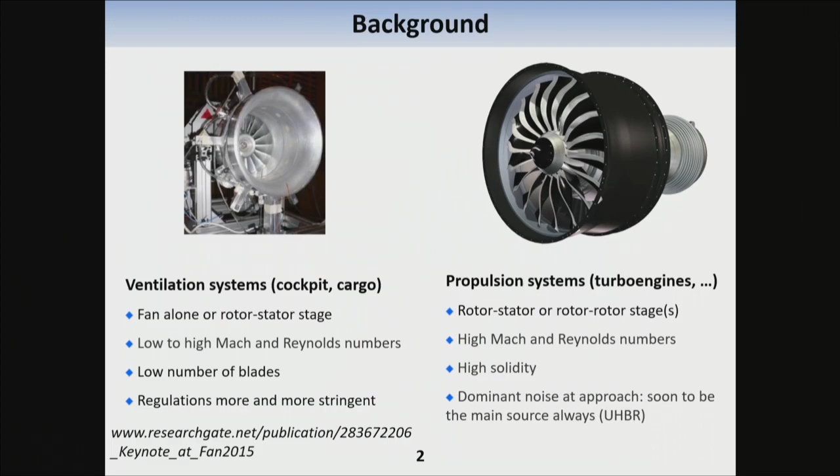These machines, I won't really spend much time on it. I actually gave a keynote a couple of years ago on that, so if you're interested, you could see basically what is the status on the noise on these machines in this link. And I will mostly spend time on the propulsion system, so the high-speed machines.

There you can have a rotor stator, or you can have a rotor-rotor stage, or stages. So you can have several stages. And all of them have high Mach number and high Reynolds number. So that makes the problem also a little bit more difficult and more computationally intense.

Now, the other thing, which is relevant both for aerodynamics and acoustics, is you usually have a lot of blades. To achieve the pressure ratio, you need a high solidity, and this will introduce cascade effects, both on the aerodynamics and the acoustics, and the effects are quite different, actually.

Now, for propulsion systems, this is very relevant even nowadays, because this is the dominant noise source at approach, and it is also the dominant source in the forward arc in almost all flight conditions. And we'll see that it's actually becoming even more relevant with the evolution of the propulsion system. And this is my next slide, to show you some of the evolution of these propulsion systems.

We will start with a plot that Chris Hughes did in 2008 at a NASA lecture, where he showed the evolution of the propulsion system in terms of two criteria. One was improved fuel burn, which is always what we are looking for, but also noise. And here it was showing the margin to Stage 4, which is the current regulation.

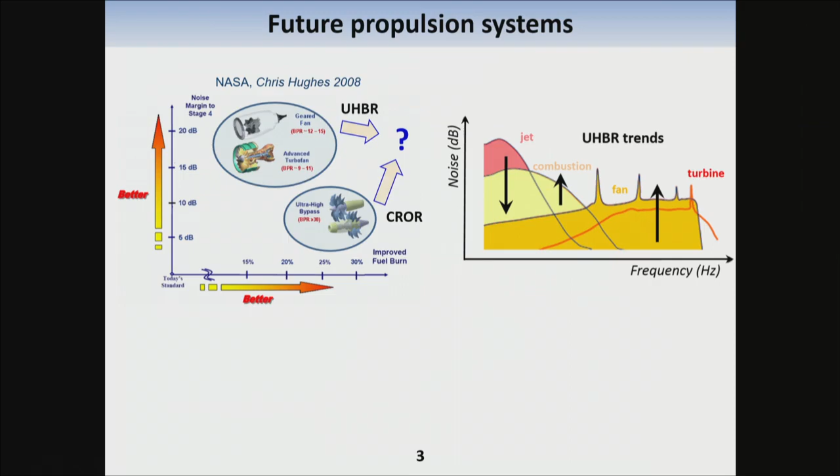And also, could we reduce the noise from the contra-rotating open rotors? And what we have seen in the last 10 years is a convergence of these two towards where my question mark is here. But in terms of integration, because aerodynamics and noise are not the only things, for the moment the choice has been to go for ultra-high bypass ratio first, and then maybe contra-rotating open rotors in the future. But for the moment, I would say this is on ice, so not selected as the next step.

So basically, there are two propulsion systems we're foreseeing in the near future, contra-rotating open rotors and ultra-high bypass ratio ones, and the ultra-high bypass ratio ones are going to be the next generation of propulsion system. But in both cases, you see that the issue was always to get improved noise. And both systems have their own tonal and broadband noise.

I'm showing an example here of a current high bypass ratio typical spectrum, where you see the noise level in dB as a function of frequency. And you could see that many components within the turbofan are contributing. At low frequency, it's the jet and the combustion that are competing. And at mid and high frequency, it's the fan and the turbine that are mostly contributing. So all these elements are relevant.

And what's going to happen with the ultra-high bypass ratio? The jet noise is going to go down because the exit jet velocity is going to go down again. Combustion noise might actually go up, for a simple reason that is not related to noise directly: we want to go to lean combustion to reduce emissions, and this is more unstable.

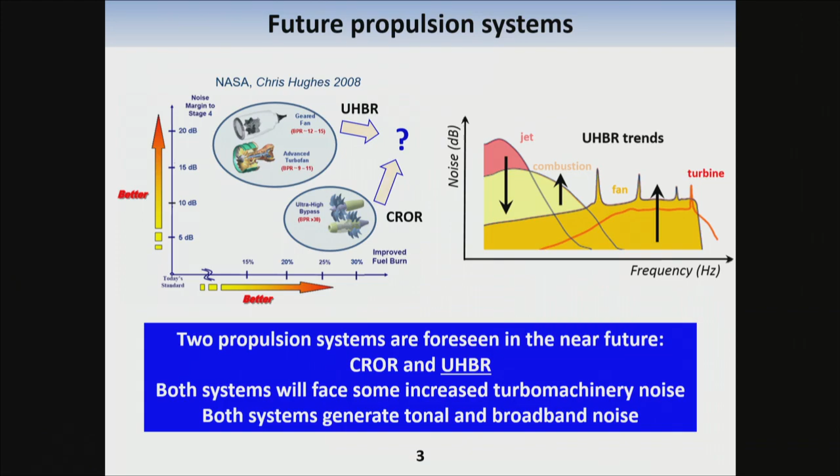And also because of the increase of the nacelles, you need to make it shorter, so you need to reduce also the number of stages, and now the turbine is not actually filtering as much as it used to, and the combustion noise may actually go out more. So this should probably go up. And then all the other contributions, and mostly the fan, because it's increasing, that's going to actually go up. So this is, I think, the trend we're going to see.

So you see that it's already a significant part of the noise, this turbomachinery noise, but it's going to become the major one in all flight conditions. So basically, we need to really focus on this subject. Now, how do we do that? So that's my next slide. It's a little bit crowded, but I will walk you through it. So these are the different methods for turbomachinery noise prediction, and I will start from the left.

Basically, in any turbomachinery noise prediction, you have 3 steps. You start on the left by defining the excitation, and this excitation will come from different noise mechanisms that you will see later. But depending on the mechanism at stake, if it's a generation of noise or propagation, it could be a vorticity wave, or it could be an acoustic wave. And these could be 2 different excitations, for example.

And then you have to define basically how the blade responds to this excitation. And this is my second step in red here. And once this blade has responded, so you have an unsteady loading, this will be an equivalent dipole that you can then consider as propagating to the far field, and you can use some kind of propagator here, either a linearized Euler propagator, for example, or an acoustic analogy. And in the examples I'm going to show, it's mostly acoustic analogies.

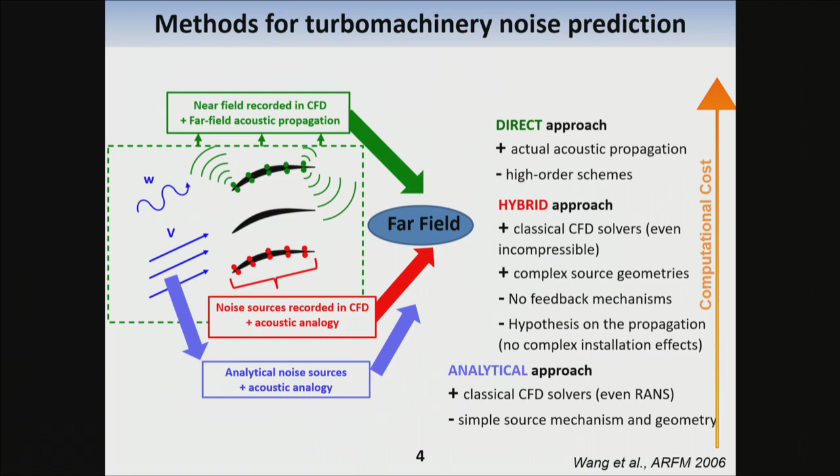And then the final one is where you do everything at the same time. You simulate the excitation, you simulate the blade response, and you also simulate the propagation. This is really the holy grail. But at this stage, it's still very computationally intense. But I will show already some examples of it. And there's one method that is actually helping us get there.

Okay, so let's start with the bottom one, the analytical approach. What do we need to do, basically, to model each of the steps analytically? I include in there also the possibility to connect that with some RANS simulations that are used commonly in design. This fits here, because the RANS will provide you some inputs for the analytical model. But, and I insist on that, everything which is acoustic is unsteady. So the RANS is not going to give you any noise information directly.

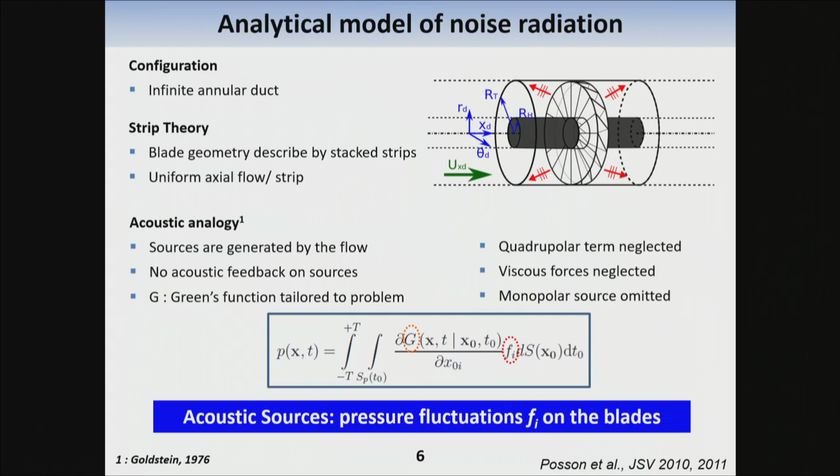Now, if we keep only the dipolar term, you see that what is left to determine now from my simplification is really this Fi, so the unsteady force on the blade. And this is the final step that we need to do: to determine the acoustic sources, the pressure fluctuation on the blade. So now, how do we do that? And you can still do it analytically, again, provided some assumptions.

Now the next step, which is valid for most of the components, except I would say the turbine, is to assume that these blades are thin, and that the camber is also not too high, and you end up simplifying with a flat plate, so a flat plate without thickness and camber. Then, as I mentioned, we neglect the viscous effects. So we are left with obtaining the inviscid flow parallel to a flat plate. And to account for the wakes, because this is a realistic feature in all this turbomachinery, we have to apply a Kutta condition at the trailing edge.

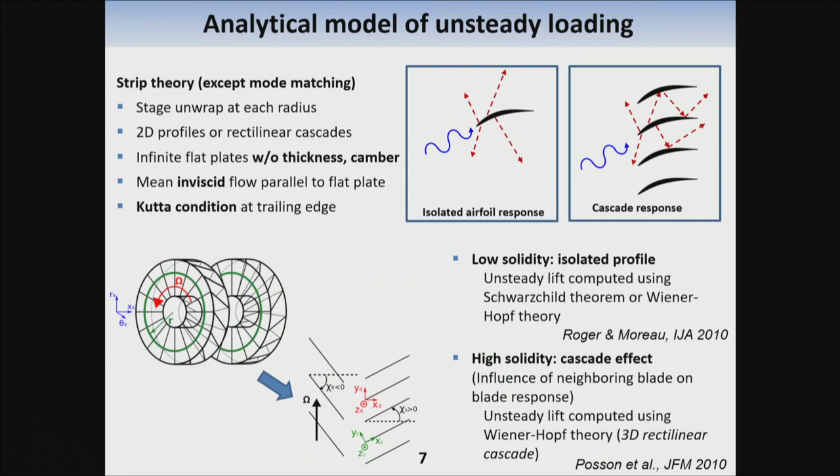Now, as I mentioned, we need to account for cascade. And if we do so, we get the unsteady lift using the Wiener-Hopf theory. But the only case that is really tractable is when you have a 3D rectilinear cascade. So we put the cascade now rectilinear. So this is what you have to do if you want to go analytical. Now, what I need to do is characterize my excitation here. What are my possible vorticity waves here, or acoustic waves?

So these are the noise sources, and I'm giving the example of a classical ultra-high bypass ratio turbo engine. These are all the sources that you can have. If I start from the inlet, you might have some upstream distortion coming from the fact that you have an angle of attack, or if you have some side wind, this will create an upstream mean distortion. By the way, in green are all the mean flow effects, and in blue are all the turbulent chaotic effects. And on top of this mean distortion, I might have some upstream turbulence that will impinge on the rotor blades, and that will create a dipolar source on the rotor blade.

Now, on the nacelle, you will have growing turbulent boundary layers, same thing on the spinner. And these boundary layers will impinge also on the rotor. And that's another noise source on the rotor. Then from the rotor, you will have growing boundary layers on the rotor blades. And this will create the boundary layer turbulent contribution, or the self-noise, or the trailing edge noise of the rotor.

And at the tip, you have also a gap, and because of that, as everybody knows here, you have tip vortices forming, and these tip vortices will also have a contribution to tip noise. So this is my source here. Then this rotor will shed some wakes, and these wakes will impact basically on the outlet guide vanes.

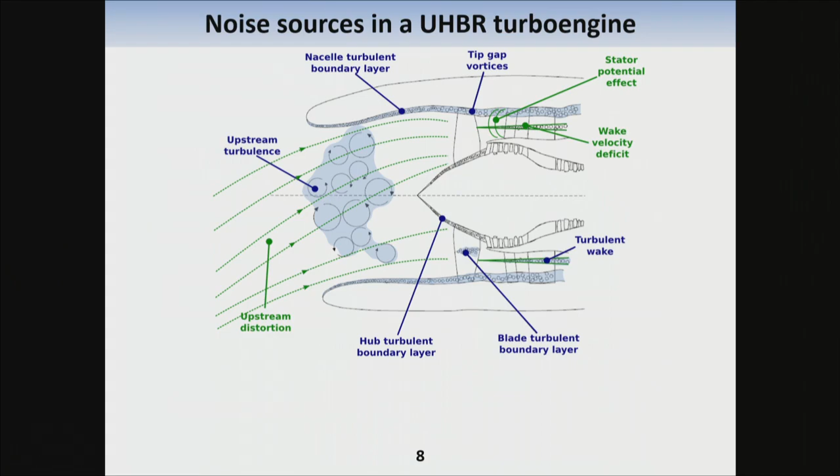So you see that overall we have many aerodynamic interactions, and we need basically to do all the steps that I showed before for all of them. And this has been actually the work that has been done in the past 20 years. One thing I want to emphasize also: when you start having heterogeneous stator vanes and cascade effects, you have an additional thing to account for, but this is feasible in all these analytical models. So in conclusion, keep in mind we have several tonal and broadband noise sources.

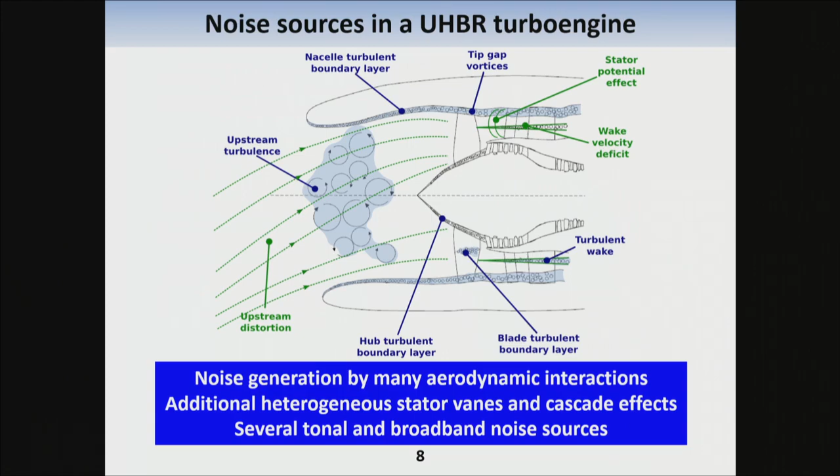So now to illustrate my words, I will go through two basic comparisons throughout the talk today. One will be the NASA ANCF. Actually, I shouldn't call it NASA anymore, but the ANCF test case that was originally at NASA and is now at Notre Dame. Sorry, Scott, I forgot to update. And this configuration is interesting because a lot of rotor stator configurations were tested. They could go from 14 to 28 stators, and you could also move the distance between the rotor and the stator.

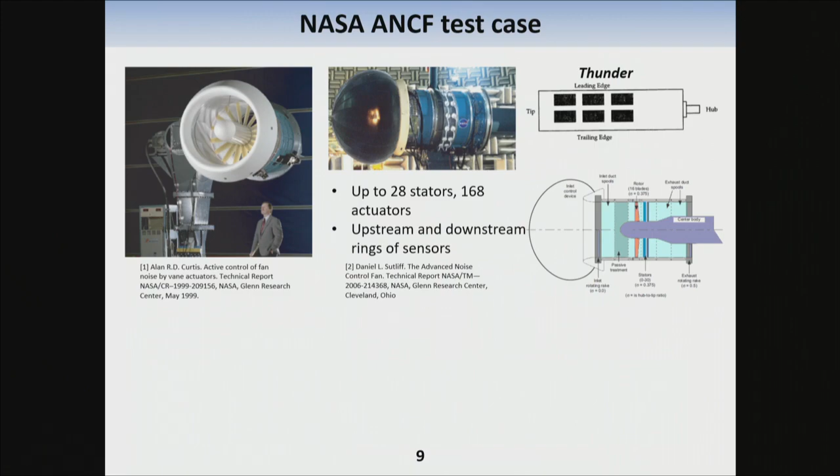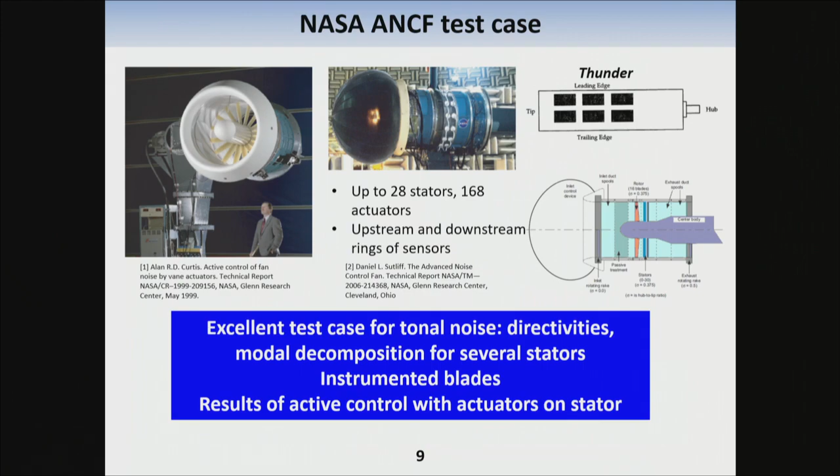It was also designed for noise localization and modal decomposition, so you have upstream and downstream rings of sensors to do so. So it's an excellent test case for tonal noise because you have directivity and modal decomposition for several stator configurations. And on top of it, you have instrumented blades, so we can also compare the blade response, our numerical and analytical ones, with the measurements. There is also some active control done on this configuration, but I won't show any comparison there.

Now for broadband, we're also using another NASA test case, which is for the moment, I think, the only one that is open: the SDT, the Source Diagnostic Test case. It's a GE configuration, very similar to a CFM56 configuration in many ways, and it's a modern high bypass ratio fan, which has 22 rotor blades and, in its main reference configuration, 54 stator vanes.

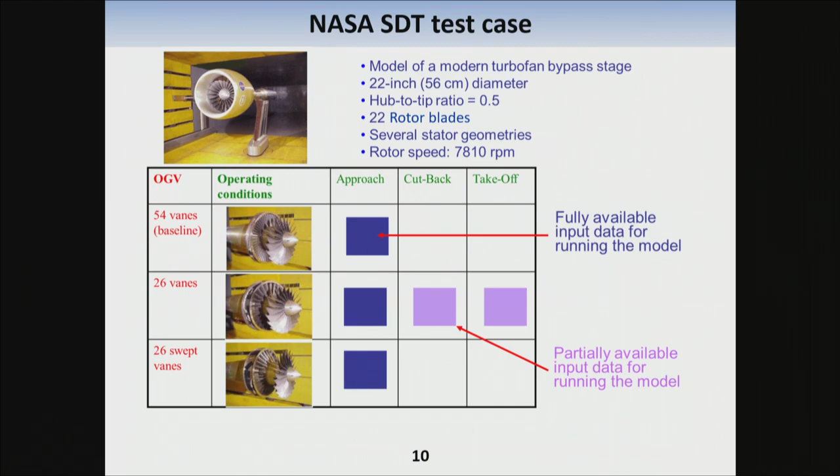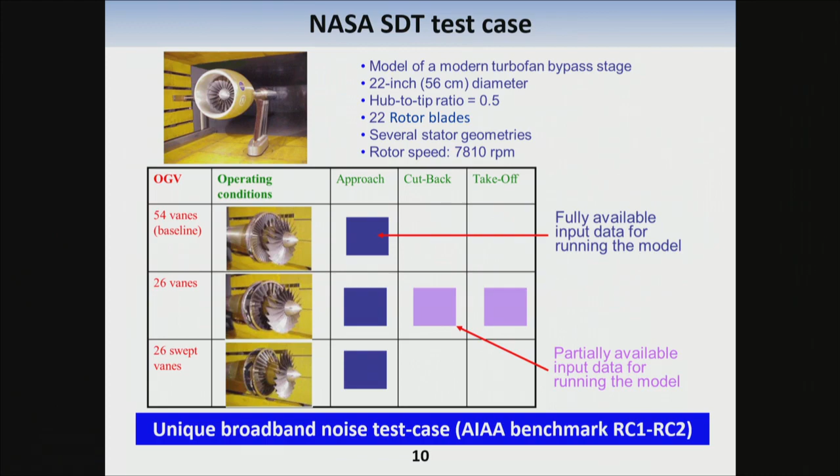This machine was tested in 3 configurations, but at approach you have a full aerodynamic and acoustic database to compare with. So this is the one that I will be comparing with. There are other stator configurations, a low count one and a swept low count one, called the low noise configuration. But as I mentioned, I will focus mostly on this one. So it's a unique broadband noise test case, and I suggest everybody try it because it's quite interesting.

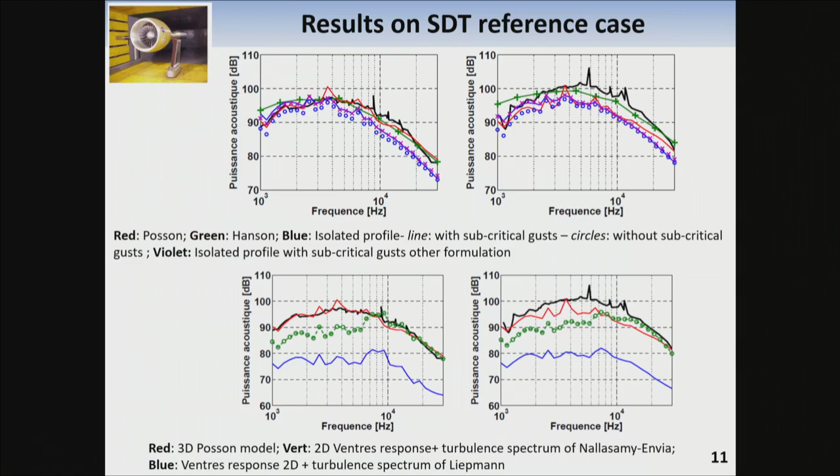So if I summarize, that's a lot of information here. I want to stress that it's very important to be 3D at all steps. You need to have a 3D oblique gust, you need to have a 3D cascade response, and then you have something that is more realistic and much closer to the experiment and to reality. And then at low frequency, you need to include a subcritical gust. And finally, the turbulence spectrum has to be very realistic and should be assessed either numerically or experimentally. And I will show an example on precisely this SDT case later on.

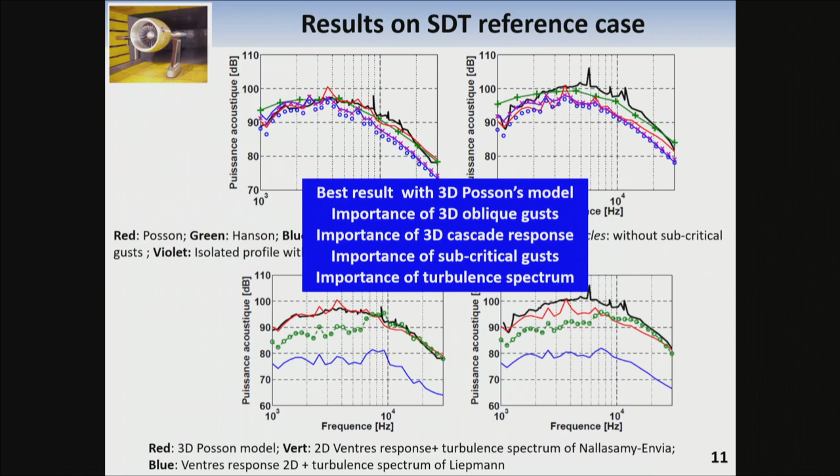Okay, the final thing that we have been looking at is the effect of swirl. I mentioned that we were assuming a uniform axial flow. Now, if you are in the interstage, between the rotor and the outlet guide vane, this is really wrong. You have a high swirl, and you're not accounting for it with your analytical Green's function. So we went to a modification of this Green's function. Now you are no longer analytical, unfortunately, because you have a sixth-order wave equation to solve when you have swirl.

But if you do so, numerically you get your Green's function, then you can compare uniform axial flow with swirl plus shear flow. So this is my comparison now: the symbols are again my NASA data. The black line corresponds to my previous model. The orange one is my new code, but putting swirl to zero, so this should correspond to the black one. So you see it's matching well, except at some resonances, but we can discuss that later on.

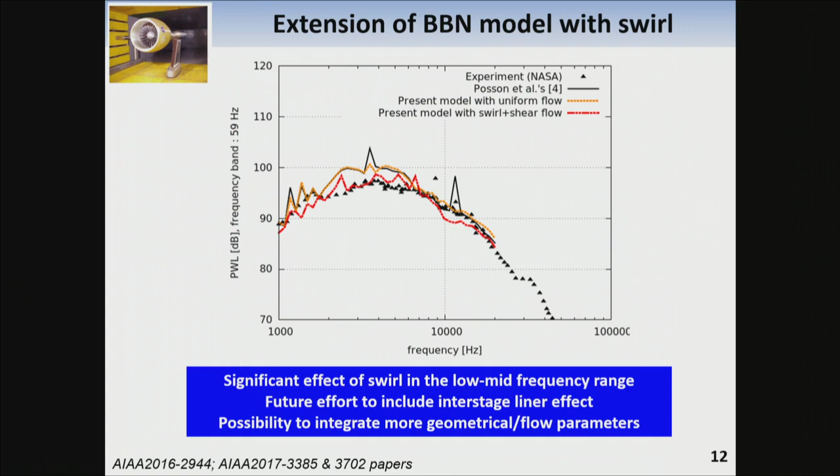And then we have the swirl effect. And you see that the swirl has actually some significant effect at low and mid frequency. So swirl is still, I think, a significant contributor here. Finally, the future effort will be to also include interstage liners, because I forgot to say it, but all that I've shown so far assumes solid walls. So no effect of liners.

We have done some effect of liner, but in a more simplistic case where we've done a propagation problem in a duct, where we basically include a lined section in a uniform annular duct. And we looked at the effect of the swirl in this section on the modal transmission loss, so transmission loss per azimuthal mode, by comparing the modal power transmitted with respect to the inlet power. Now, if you want to have details of our analytical development, you can go to these two JFM articles.

The main effect of including swirl is to have this additional red term here in the Ingard-Myers classical effective impedance. And you see that it's actually related now to the vortex design of your blade. So the swirl is playing this role. From an acoustic point of view, swirl adds a spring-like term in the original mass-spring-damper system that the Ingard-Myers model describes.

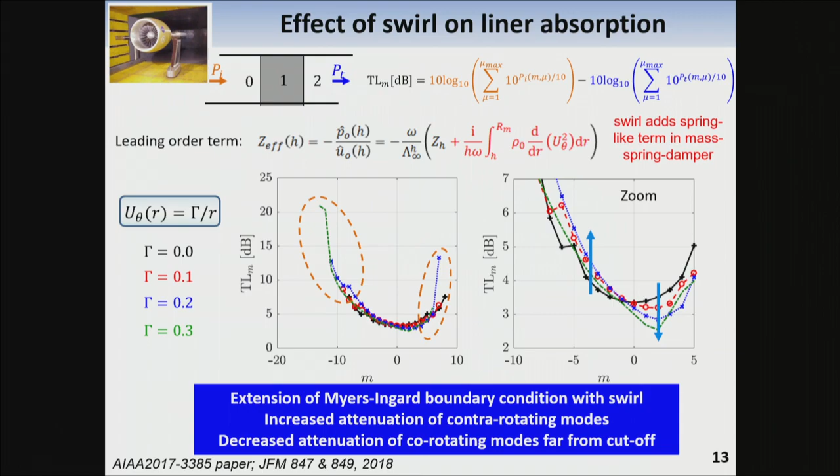There are some effects of swirl: the whole diagram, which had this bell shape without swirl, is now rotating with respect to mode 0. So you have a decrease of the transmission loss for the co-rotating modes, and an increase of the transmission loss for the contra-rotating modes. So swirl increases attenuation of contra-rotating modes and decreases attenuation of co-rotating modes. And far from cutoff, I have to insist. So this is one model.

Now, one thing that is problematic in any of these models based on strip theory is that you always have rectilinear discontinuities between the different strips. And also, because you have strips, you prevent any dispersion of the mode in the radial direction. So to account for that, we've been developing a new method called the mode matching technique, where we do a field expansion in orthogonal modes in each subdomain: before a row, in the row, after the row.

If you do that, you can eliminate the need for a rectilinear response. Then you match the acoustic field at the interfaces, ensuring continuity of pressure and velocity at the interfaces before and after the blades. You end up with an infinite system of equations, so you need to truncate, and then you get the modal coefficients by matrix inversion of the truncated system. The basic theory is not too complicated, but it's quite involved to get it to work fine. At least it eliminates the problem of the rectilinear discontinuities.

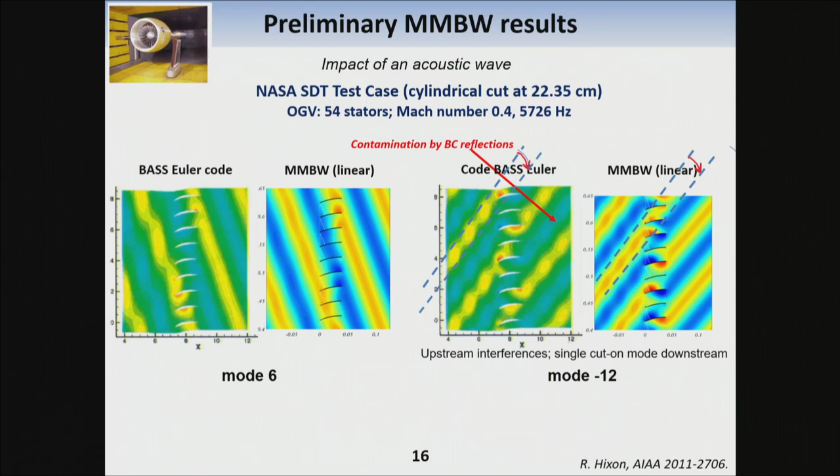When we look at the angles also of the waves that are either reflected or transmitted, we also have a very good match between the two calculations. And the other thing, the advantage actually of the analytical model, is that we don't have any spurious reflections from the boundary conditions that you see here and here in the Euler equation. So I would say we have an excellent agreement, with excellent results without the spurious reflection.

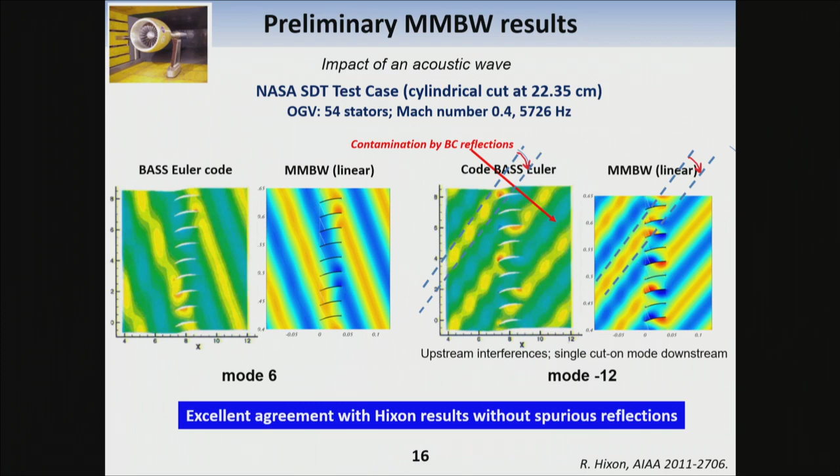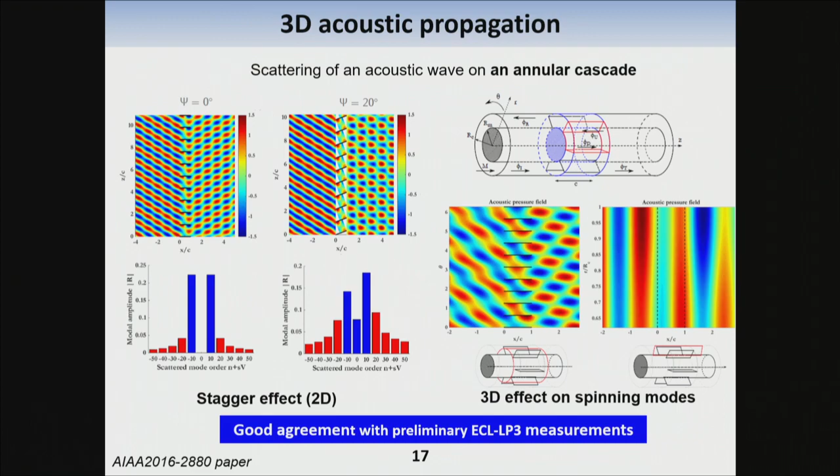And then we went also to a 3D configuration to show that we could have this radial mode scattering that we couldn't have with the strip theory. And you see that we have a nice continuous field both upstream, so the blades are here, both upstream and downstream of the cascade. And these are actually in good agreement with preliminary measurements that have been done in the LP3 setup at École Centrale de Lyon.

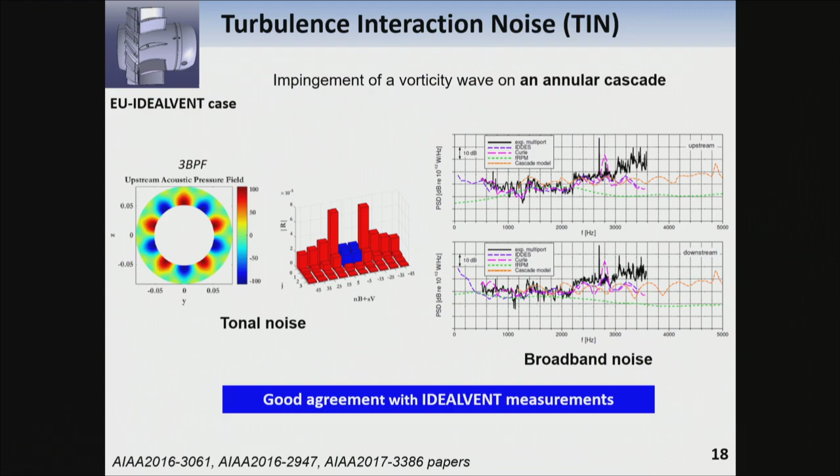And more challenging was to see what we could get from the broadband side. The measurements are in black here, performed at VKI. And all the purple, pink, and green dashed lines are simulation. The purple one is a fully IDDES simulation of the system. Our simulation is this cascade model here, and you see that we are predicting as well as this much more involved test case, and at a much lower cost. Of course, it's almost instantaneous compared to the other one. So the mode matching is, I think, another very promising method.

Okay, enough of this analytical model. Let's move on to hybrid cases. All of this will involve numerical methods to predict the noise sources, and we will use different approaches depending if we want to get only tonal noise. Tonal noise is mostly generated by deterministic problems, like mean wake impinging on the stator, for instance. And this can be dealt with nicely with URANS. I will show some example of that. And it does need turbulence modeling.

Now, if you want to go to broadband noise, which covers all the frequencies, you need to go to some more involved unsteady simulations where you have to resolve some of the turbulent eddies. If you limit yourself to the larger eddies, you can do a large eddy simulation. And if you resolve all of them, then you can do a DNS. For these two approaches, we have been using two different methods. One is based on the classical Navier-Stokes solving, and the other one is based on the lattice-Boltzmann. So on the lattice, we solve the Boltzmann equation. And this is my LBM test case.

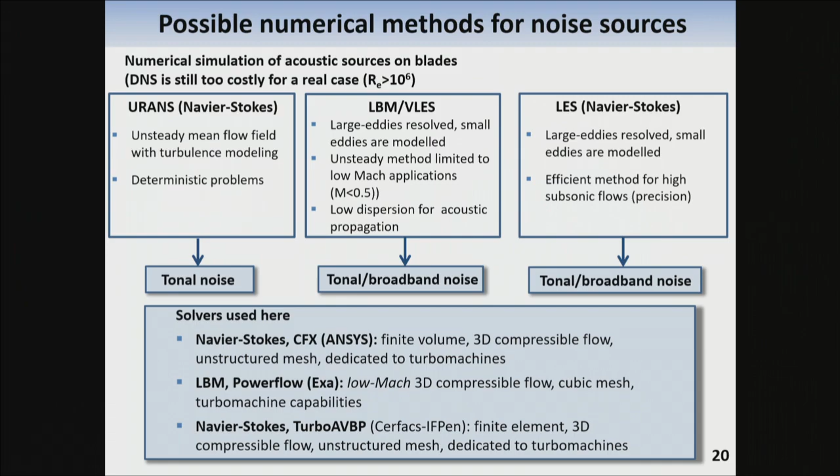Now, in terms of codes, we've been using mostly CFX ANSYS for the URANS runs, PowerFlow from Exa, Dassault now, for the LBM, and AVBP for the unstructured 3D LES compressible solver. One thing I want to emphasize, all of these will be compressible simulations. So we are really solving also the acoustics in the field. And DNS is a little bit too costly, even though we start using it for airfoil noise.

The first case we ran was the compressor case, compressor wake interaction noise, because the blades are small and they don't need as many grid points. And also it's a low pressure research compressor, so we have a lower Reynolds number. And these are two examples. So we started doing the URANS and predicting tonal noise, and then we went to do some LES simulation that you see on the left. What we learned from it is, we didn't have any acoustical data for this one, so we couldn't compare, but we did some assessment of some technological effects.

And on tonal noise, we showed, actually with this thing, by changing the geometry here of the stator vanes, that viscosity, thickness, and camber had some effects, but the main one was really camber. We could neglect viscosity and thickness, basically. So that's why we modified the analytical model to account for camber.

Now, what we learned from the LES side was the importance of the span-wise coherence length on the predictions. And this is also very consistent with airfoil noise. We know that the span-wise coherence of wall pressure fluctuations is one key element if you want to have a good prediction. So this is confirmed by the direct simulation here.

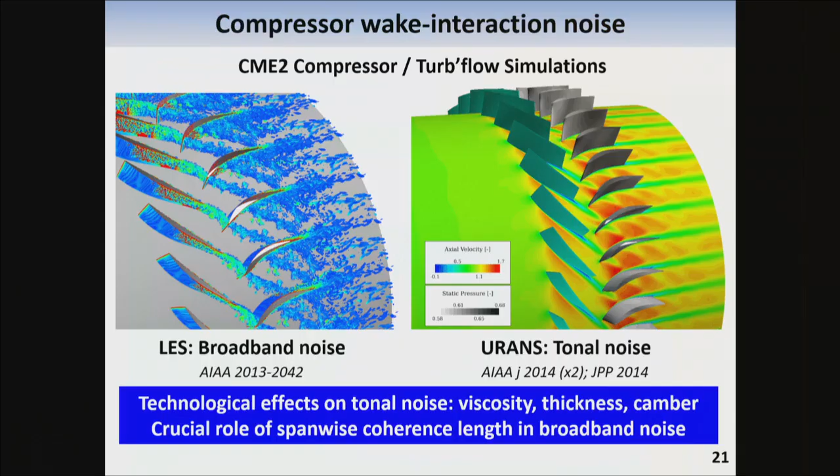But one thing I want to emphasize is URANS is actually under-predicting the levels, and by a big margin, as we'll see in the next test case. And this is for all turbulence models, and we had much better results with LBM using an LES approach, where we have much stronger levels. But I still haven't compared yet, so I need to do that.

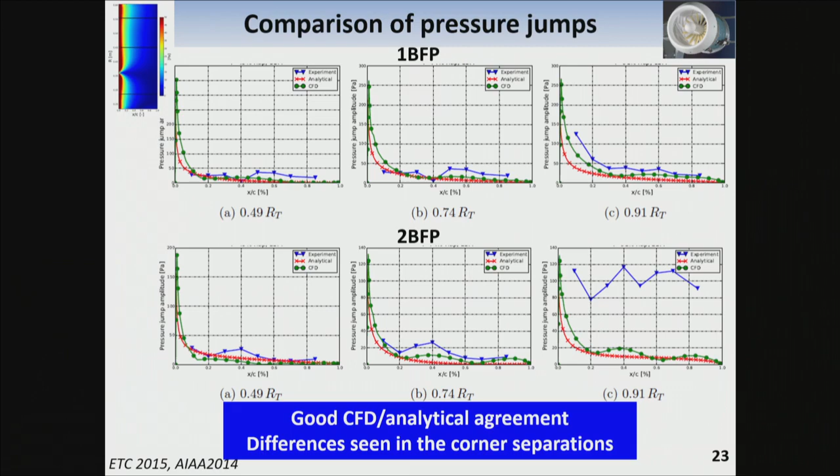And you see that the analytical prediction is matching quite well the URANS calculation, and consequently also the experiment. So differences are only seen, I would say, in the corner separation, and of course the analytical model cannot do much there. Now, what is the consequence? Because these are probably big differences for aerodynamicists, but what are the consequences on acoustics? And this is actually quite mellow.

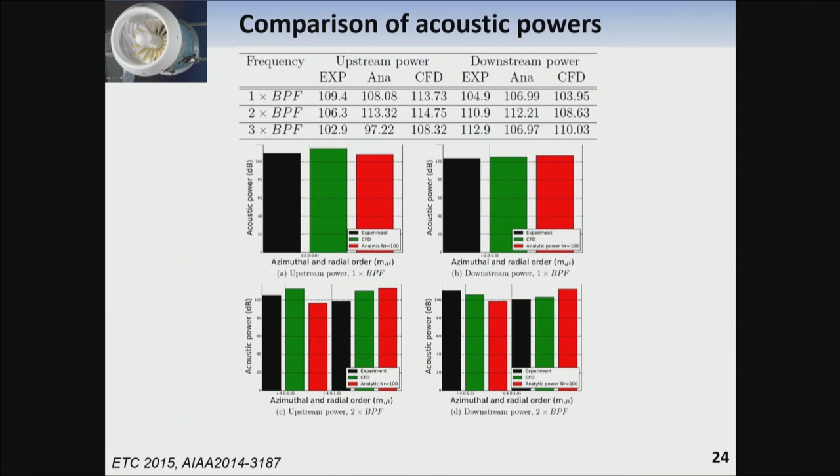We see here the prediction from both: again, CFD will be in green, red will be the analytical guys, and the black guy is the experiment. And you see that for both the BPF and the 2 BPF, we have a good modal distribution, and also pretty good levels for all different modes. Things start to be worse when you move to higher radial modes, which is, again, expected because of the strip theory preventing the scattering in the radial direction. So good overall analytical and experimental agreement.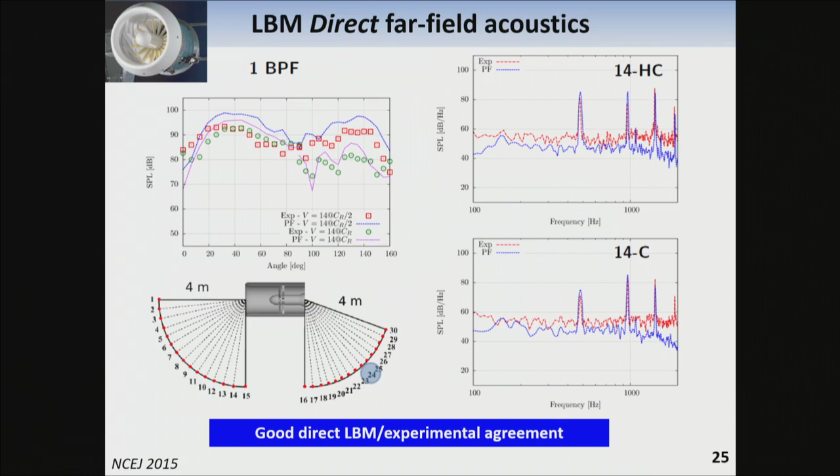But the tonal noise is quite well predicted. So if we refine the grid, we should probably get better results. Okay, from there on we also looked at heterogeneous stator distribution, and we did PowerFLOW simulation. We didn't have any experimental result there, but we compared the PowerFLOW result that you see at the top, and this is for one configuration here.

We've done many more. And I wanted to show this slide because it shows the power of the analytical methods. Because when you compare the sound power level as a function of azimuthal modes, you can split in different components with the analytical models the different origins of the sound. So for example, for the homogeneous case, we could show nicely that everything was coming from the wake. So wake interaction, no surprise here.

But the residual one that we had in the simulation, and also in the measurements in this case, was due to the distortion. We have a residual distortion at the inlet because of the experimental setup, and this is actually causing this background level. So this is distortion and wake.

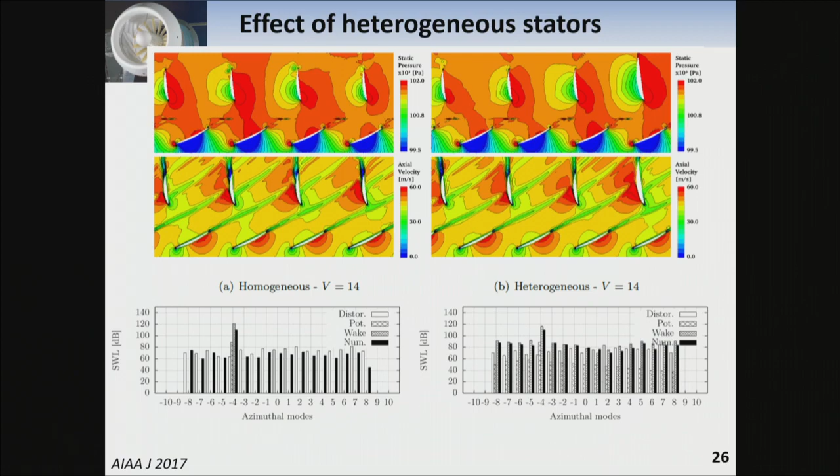Now we add a small heterogeneity here, so we thicken one stator blade, and we increase also its chord length. And now we look at the differences, and you see that now we have an increased background level. It's still wake dominated, but now we have a potential effect that is popping up and contributing. So again, the analytical acoustic models really provide a nice idea of that.

Finally, one thing that is important with direct simulations is you can also discover new mechanisms that had been seen in the 70s by Parker in some Rolls-Royce machines, which are resonances. So we showed that in one configuration we had a beta Parker mode, and that was contributing to a tone that we didn't understand, that was not blade passing frequency at all.

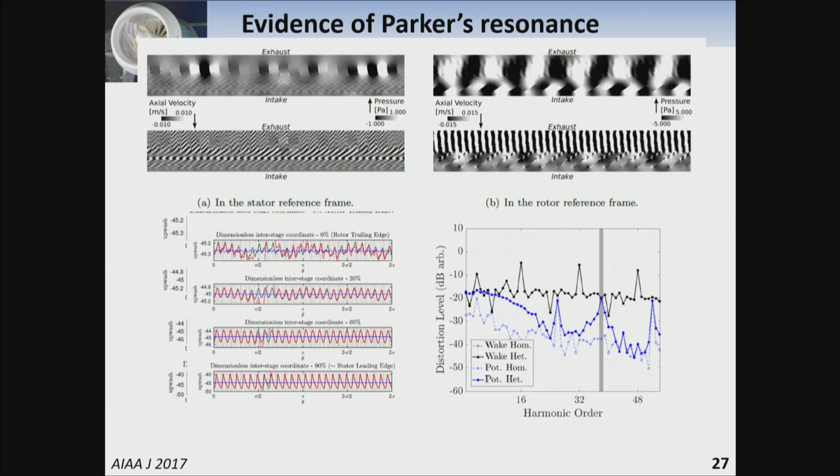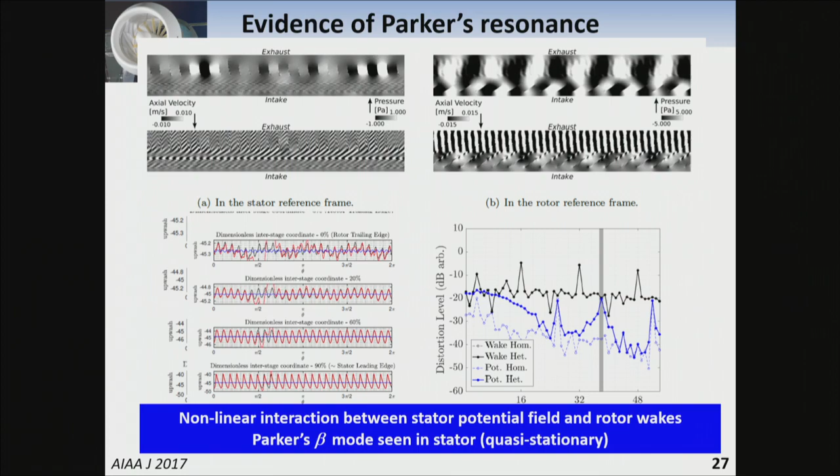So this is really an interesting outcome of the unsteady LBM VLES case. And we showed also that it's a nonlinear interaction between the stator potential field and the rotor wakes. So I think it was a nice outcome.

Now moving to broadband noise, and I will show only one case, which is the SDT case and the reference case at approach. So we performed LES simulation of a slightly modified version of it, because now we have 55 stators, just to limit the number of blades. But these are the results that we obtain compared to the RANS.

So in terms of overall performances, it's slightly worse than the RANS, because we probably are still missing grid resolution. But we are nicely in the ballpark, and we are getting there. And we have very similar results as a parallel lattice Boltzmann method simulation. So far, there are two simulations, this LES and the LBM case. Okay, I will probably skip this one because I see that the time is flying.

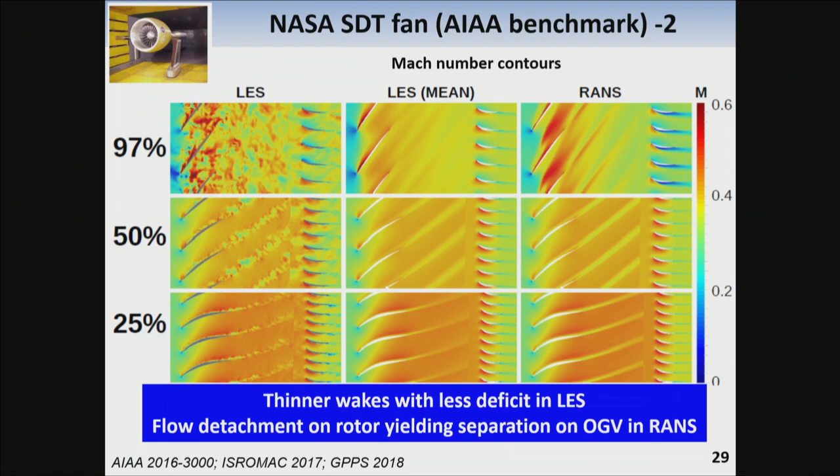One thing I want to emphasize from these blade-to-blade contours, and this is typical in all the simulations we've run when we compare the LES and the RANS, is we have thinner wakes with less deficit in the LES, which match the experiment more closely than the RANS. And also we have flow detachment on the rotor in the RANS, which is not the case in the LES.

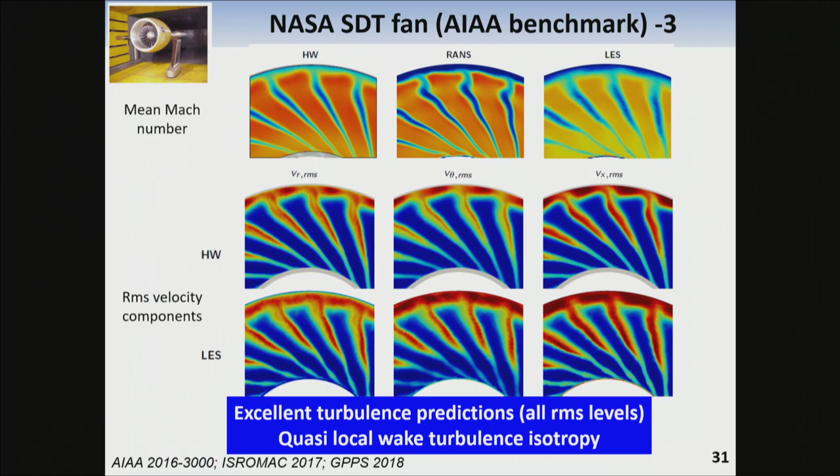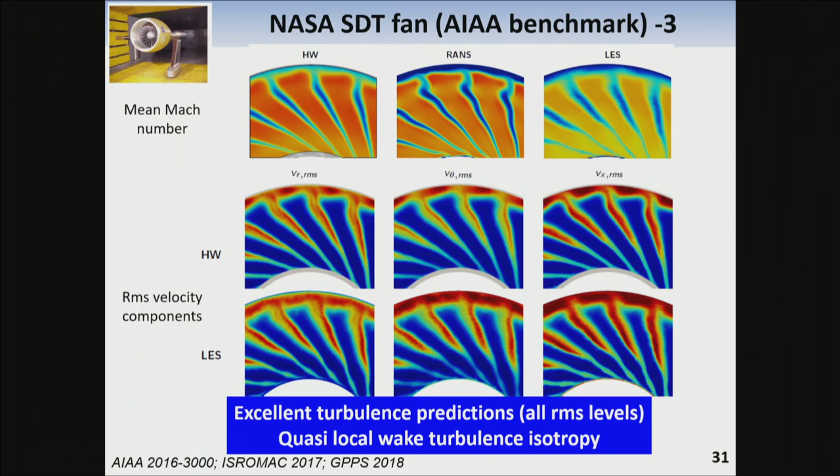And the other outcome of that is that we have a quasi-local wake turbulence isotropy. And this is also very good news for the analytical model, because this is an assumption that you also need to be able to have an analytical prediction. Okay, this is aerodynamic, so I would say the overall aerodynamic field is pretty well predicted.

What about the acoustics? So we did two acoustic predictions, one with Ffowcs Williams and Hawkings, and one with a Goldstein analogy, which is meant for annular ducts. So in this case, we don't account for the duct. In this case, we account for the duct. First, the Ffowcs Williams and Hawkings results. So my black line is the measurements, and all my colored ones are basically different cases.

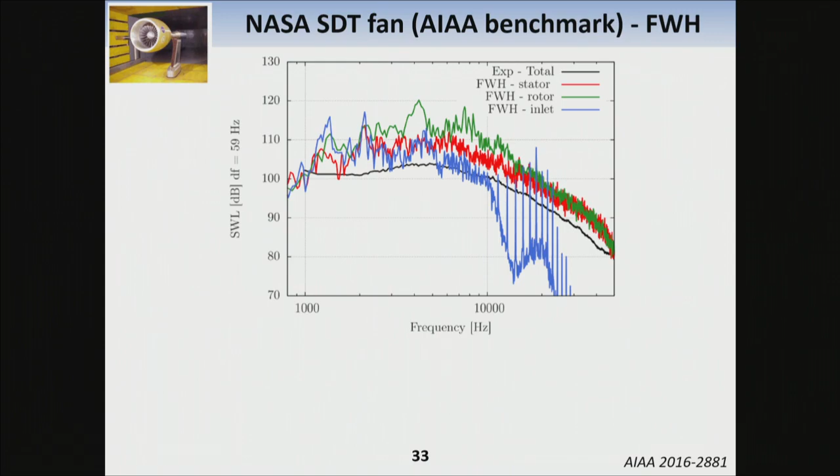The red and the green correspond to Ffowcs Williams and Hawkings based on the wall pressure fluctuations on both blades. And you see that we have the correct trend, but we overpredict the level. Now we did another one, which was a porous surface that was put actually at the interface between our stationary domain and rotating domain, where we had data, and we looked at the levels. And we are recovering the levels much better, which shows that things are behaving well. And then because of the grid resolution, we have a cutoff at 10 kilohertz.

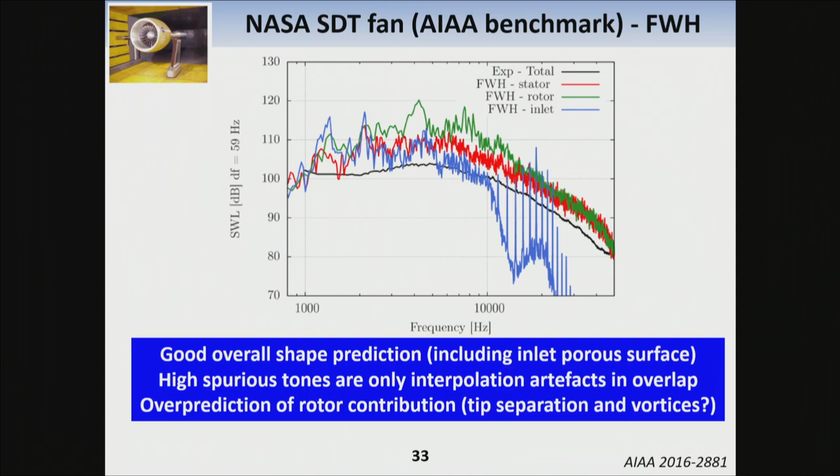So overprediction of rotor contribution, and especially what is of concern is this guy, and we'll see that in the next plot. Then we went for Goldstein, so now we are comparing Ffowcs Williams and Hawkings in blue here to the red, which is Goldstein accounting for the duct. Now, one thing to be noticed is that my Goldstein now is recovering most of the levels, both the intake and the exhaust, so upstream and downstream, over a range which goes from, I would say, 3,000 hertz all the way to 40 kilohertz.

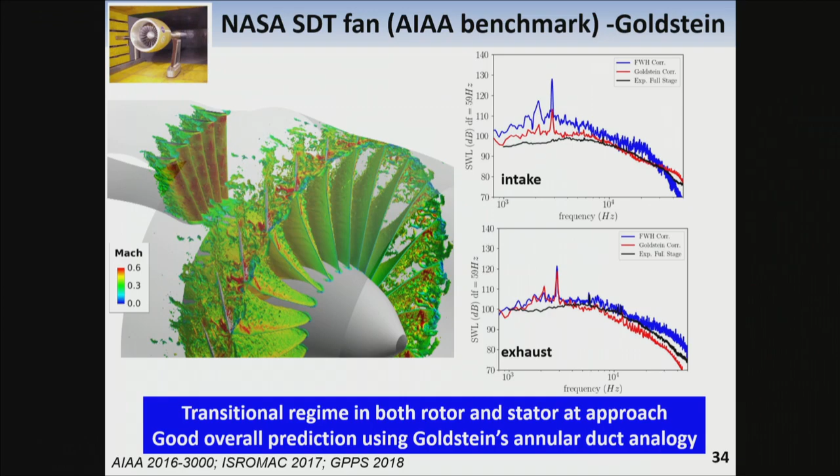And now we have a much lower prediction even here. We still have this peak here, and we have it also here, which still comes, I think, from the low resolution in the tip gap. So this is what is being investigated now. On the left, I'm showing also some flow features. So it's totally laminar on the pressure side, and on the suction side, you see that it's turbulent at the tip and laminar closer to the hub. So I would say at this stage we can do a very good prediction with Goldstein.

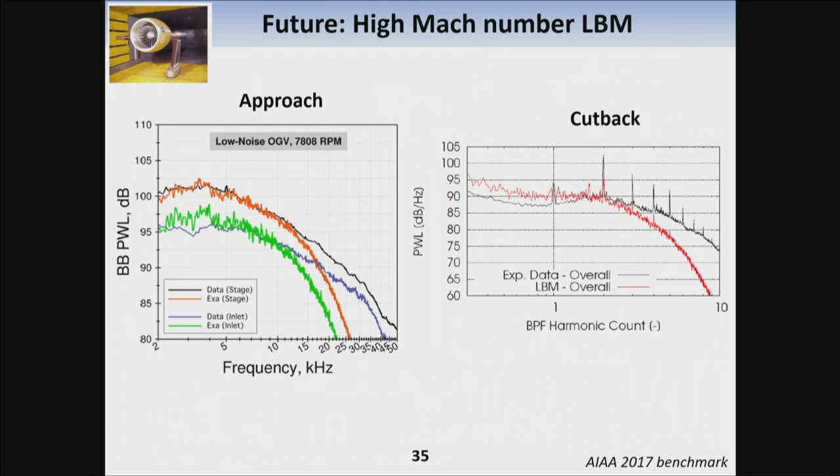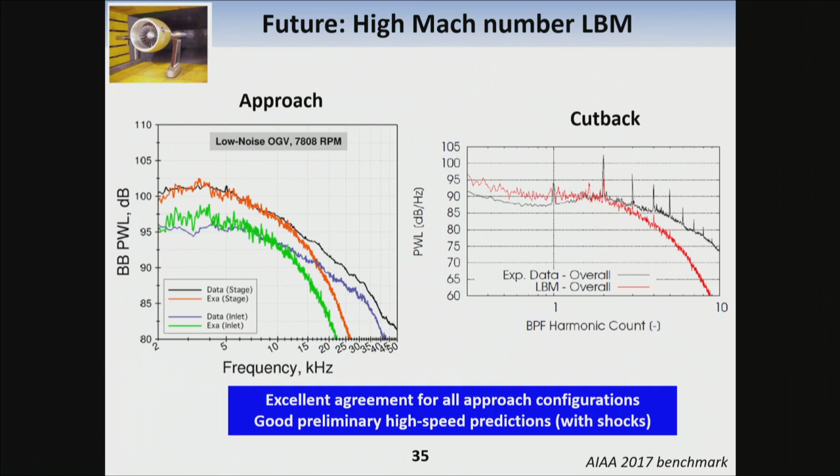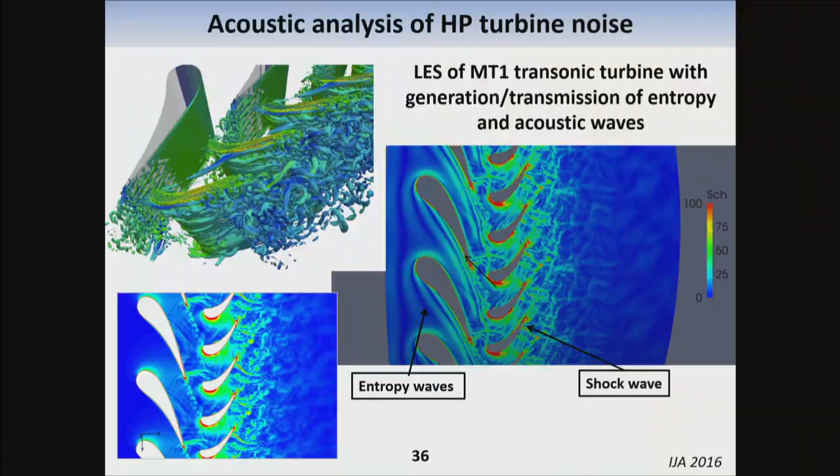So you see that they are doing quite well up to a certain point, and these are direct noise calculations, okay? These are not hybrid. And same thing, at cutback it's probably not as good, because it's cutting a little bit lower, but they can do it also even at high speed now. So I would say overall excellent agreement for all the cases they have run, and a good preliminary case where there are shocks. So the LBM is really coming up to speed. And I will skip this one. So we did some HP turbine noise also, but I will skip this one.

And I will go directly to the conclusion. So I hope I have convinced you that we're able to do now some good analytical models for both tonal and broadband noise. And they can account for duct or not, and they can account for cascade or not. So Schwarzschild or Wiener-Hopf method. And then there is a nice alternative method being developed, which is the mode matching technique. And they are all efficient, accurate, pre-design tools. And I showed only turbofan applications, but they can be applied to low-speed fans, propellers, compressors, all kinds of machines.

And we've extended that to swirl and lined walls. And again, there too, we should be able to extend the mode matching technique. These models are now included in a software platform that we call OptiSound. On the numerical side, I can say that the URANS are very efficient methods to obtain tonal noise. And what is coming up to speed and will be, I think, the current and future of turbomachinery noise prediction is the LES of these turbofans. Even though they remain expensive, the first results are very promising.

And then LBM, so the lattice Boltzmann method, is also a very nice alternative on the numerical side. And it works also for high Mach number.